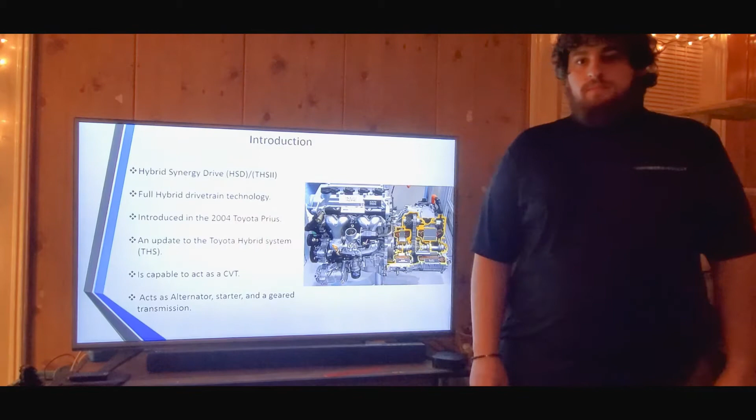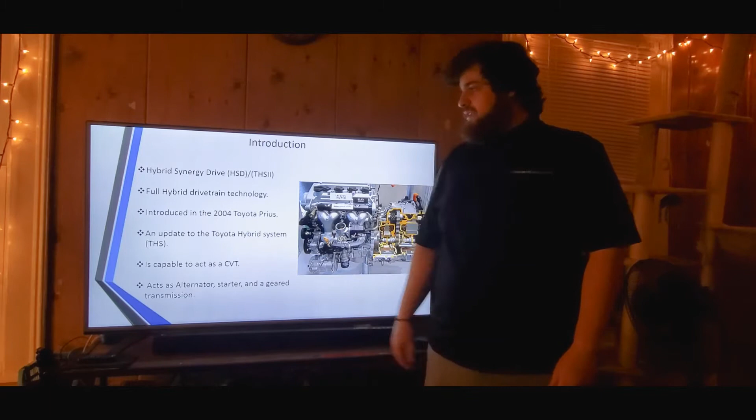The hybrid synergy drive is a full hybrid drivetrain system made by Toyota and was introduced in the 2004 Toyota Prius, and was used in other Toyota and Lexus models. The hybrid synergy drive is an update to the Toyota hybrid system, hence why some people call the hybrid synergy drive the THS2, or the Toyota Hybrid System 2.

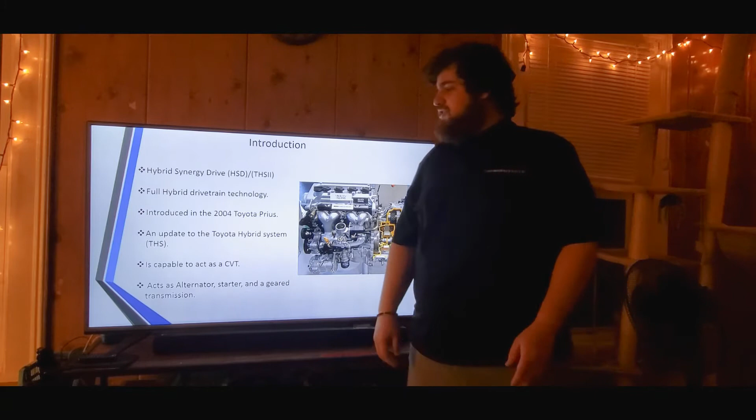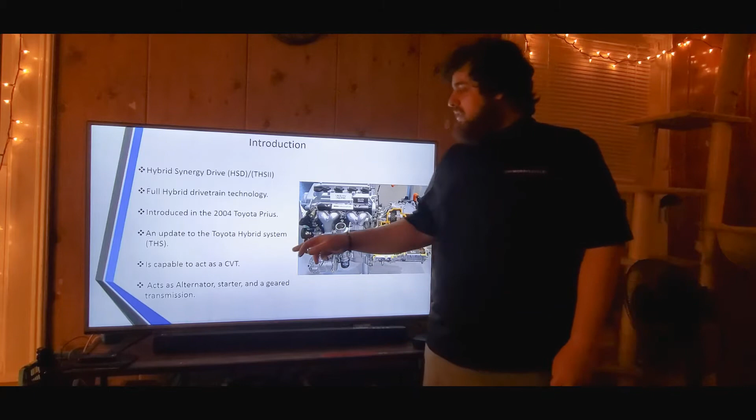The hybrid synergy drive allows the vehicle to run using only the electric motors, making it a full hybrid system. It can also act as a continuously variable transmission, as well as acting as the alternator, starter, and geared transmission, which I will touch upon in the next slides.

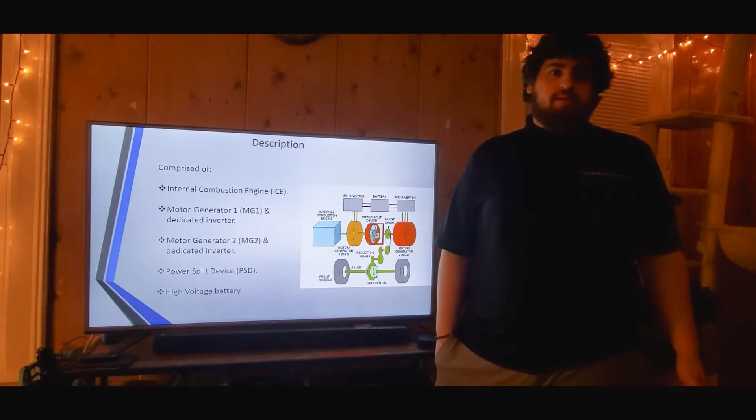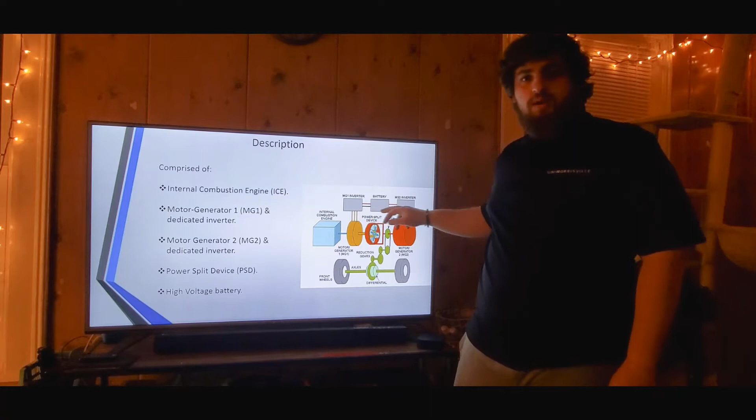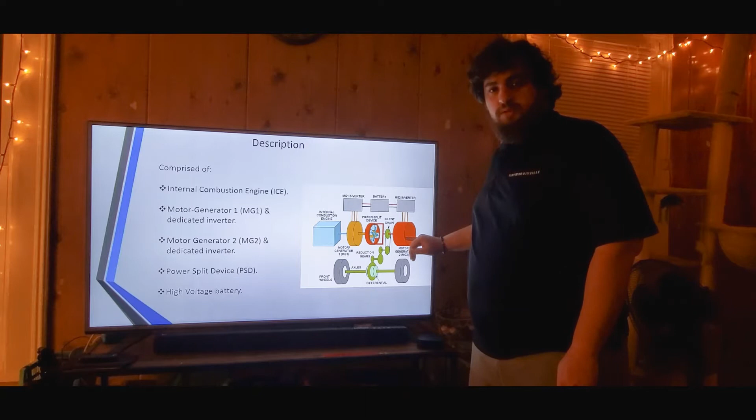The hybrid synergy drive is comprised of the internal combustion engine, which is a 4-cylinder 1.5 liter engine on the older models or 1.8 liter engine on the newer ones, 2 computer-controlled motor generators and dedicated inverters for each one, 1 high-voltage battery, and 1 power split device. The power split device connects the internal combustion engine, motor generator 1, and motor generator 2. Motor generator 2 is connected to the differential by a set of reduction gears.

In this slide, I'm going to be talking more about the description of the hybrid synergy drive. MG1, which is the motor generator 1, acts more like a generator for the whole system, as well as a starter for the internal combustion engine. MG1 can also supply more power to MG2 under certain acceleration demands.

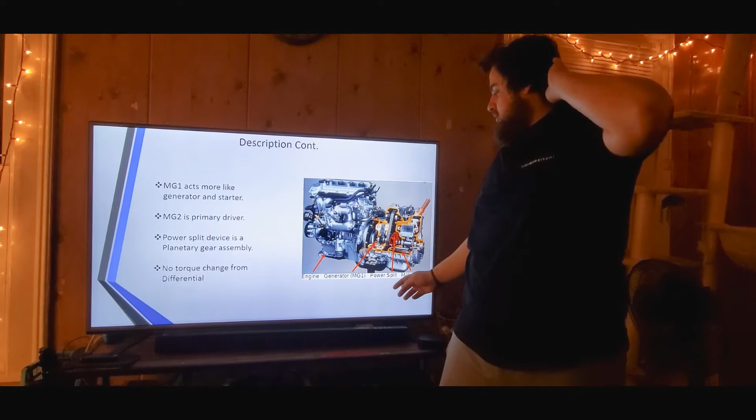The MG2, which is the motor generator 2, has more power output than MG1, and that's why it is used as the primary driver for the whole system.

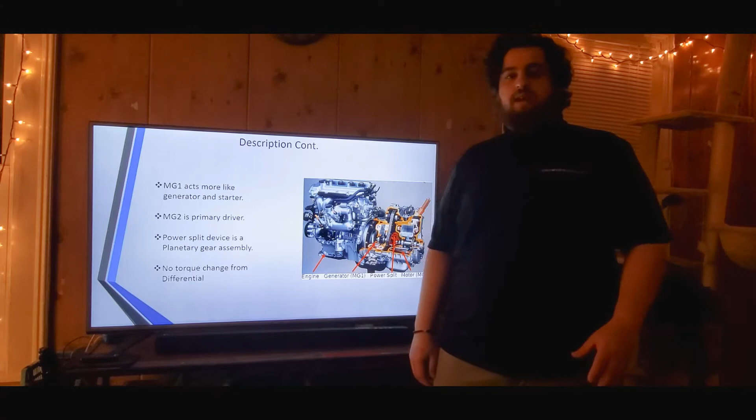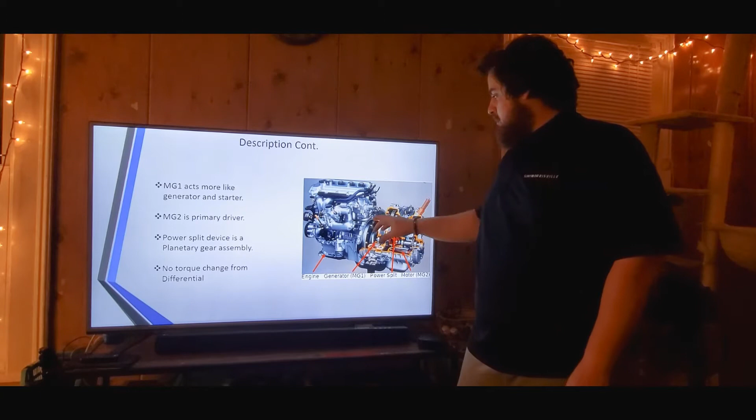The power split device in between the MG1 and MG2 is a planetary gear assembly that has a sun gear, a ring gear, and a planetary carrier. The MG1 and MG2 and power split device are all housed in one unit bolted to the internal combustion engine.

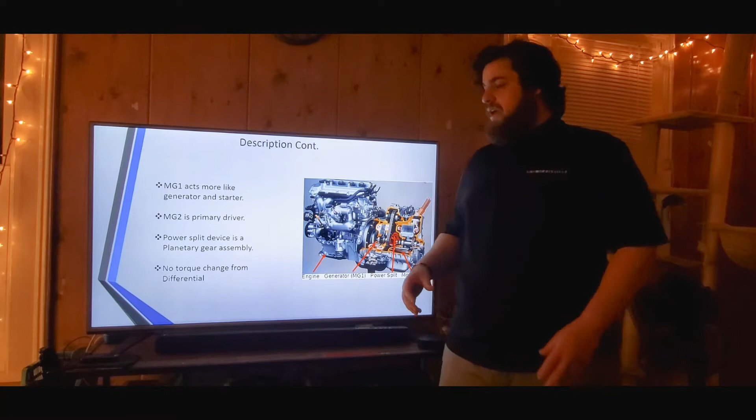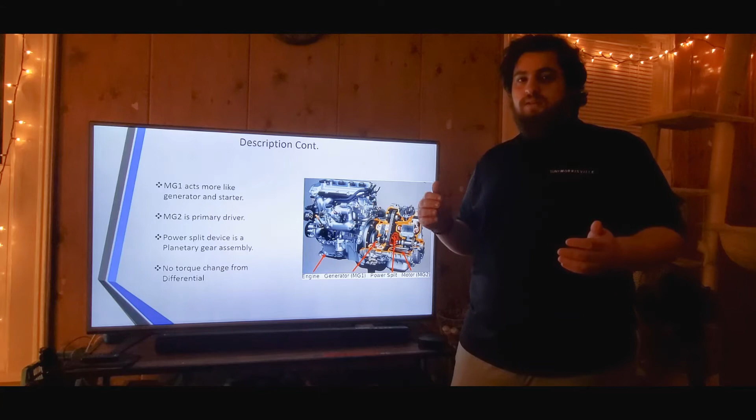What's interesting about this system, well, more about the differential that the system uses, is that it does not change the torque from the output to the input coming into the differential. It only changes the torque between the right and left wheels around a corner.

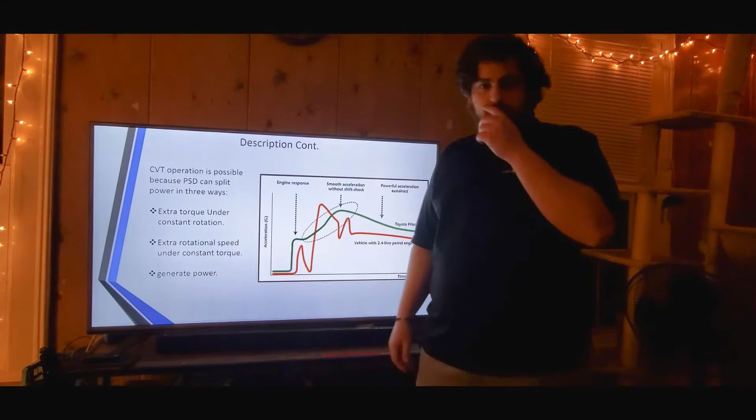Toyota's hybrid synergy drive can act as a continuously variable transmission by manipulating and splitting power in 3 ways: extra torque under constant rotation, extra rotational speed under constant torque, and it can also generate power to aid in uninterrupted acceleration.

This graph illustrates the smooth sustained acceleration of a hybrid synergy drive equipped Prius in green, compared to a 2.4 liter gasoline engine equipped vehicle in the red.

In this slide, we're going to be talking more about the hybrid synergy drive's operation, more specifically the power split device and what it's connected to.

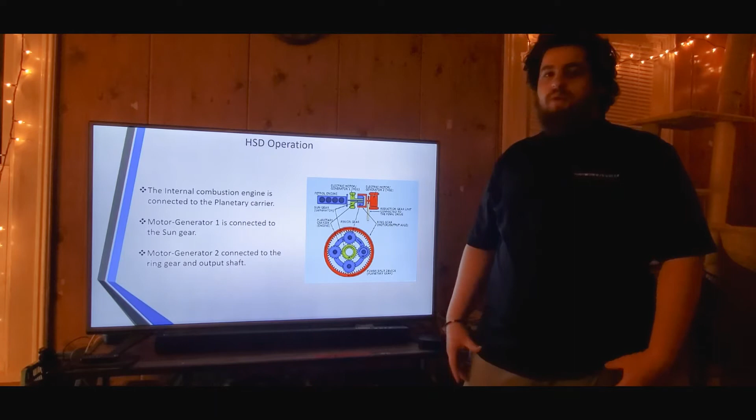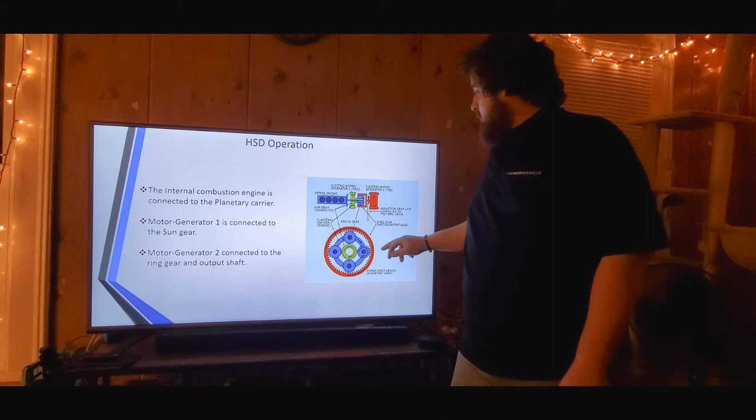The planetary carrier on the power split device is connected to the internal combustion engine, while the motor generator 1 is connected to the sun gear, and the motor generator 2 is connected to the ring gear as well as the differential through a set of reduction gears. In the next 3 slides, we're going to be talking more in depth about power split device operation, more specifically the operations that come up during certain circumstances or demands.

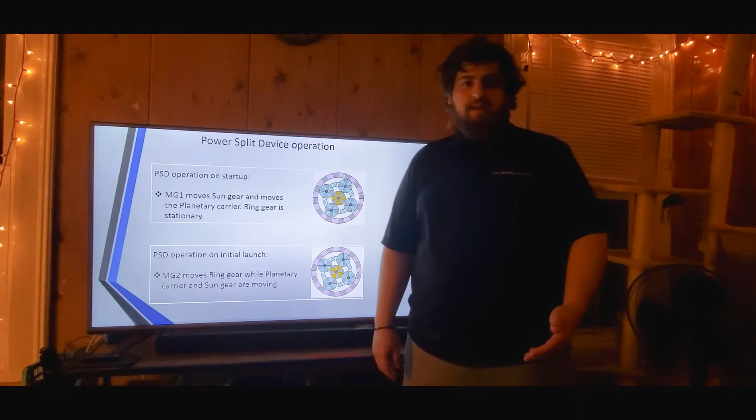The first power split device operation is startup. During startup, the MG1 powers up and moves the sun gear, which in turn moves the planetary carrier. All the while, the ring gear is stationary.

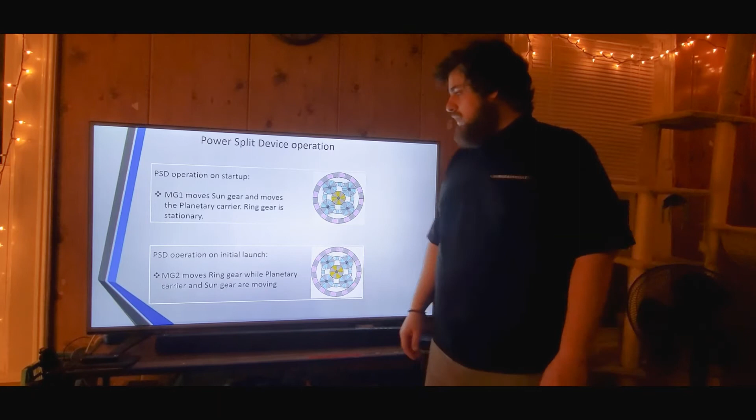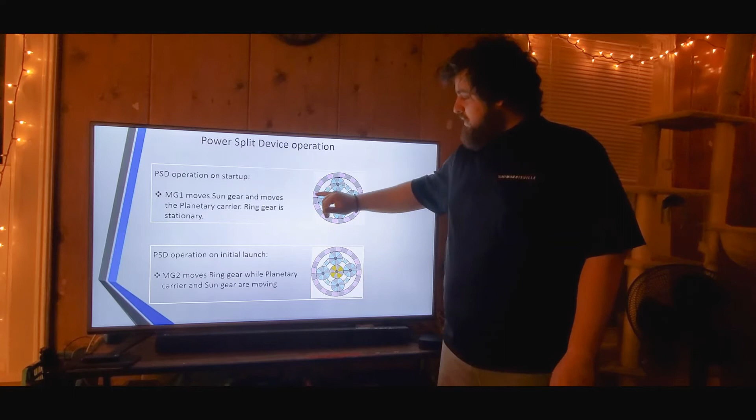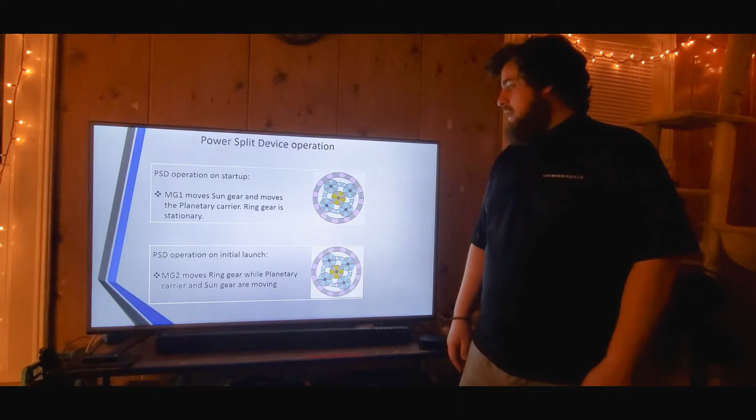The next mode of operation we have is initial launch. Since the ring gear is connected to the drive wheels through the differential, on startup it will be stopped, hence the car will not be moving. On initial launch, MG2 will power up and it will move the ring gear while the planetary carrier and the sun gear are already moving.

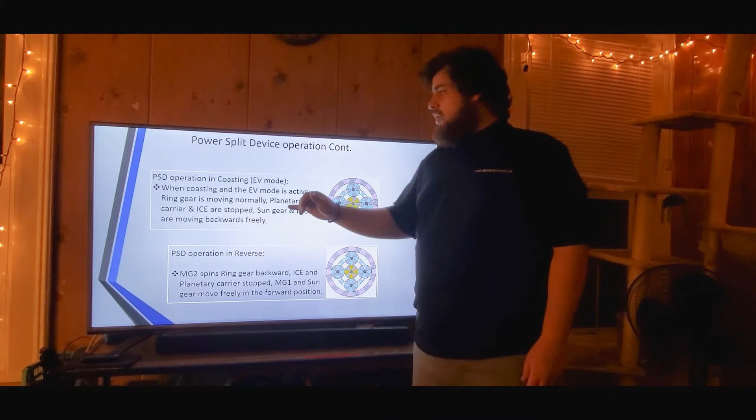The third mode of operation we have is coasting, or EV mode. EV mode means electric vehicle mode, where the vehicle is moving only on electrical power and no internal combustion engine. When coasting and EV mode is active, the ring gear would be moving normally as it was on acceleration, but the planetary carrier is going to be stationary and the internal combustion engine is going to be off. The sun gear and the motor generator 1 are going to be moving backwards freely to allow for power generation while coasting or in EV mode.

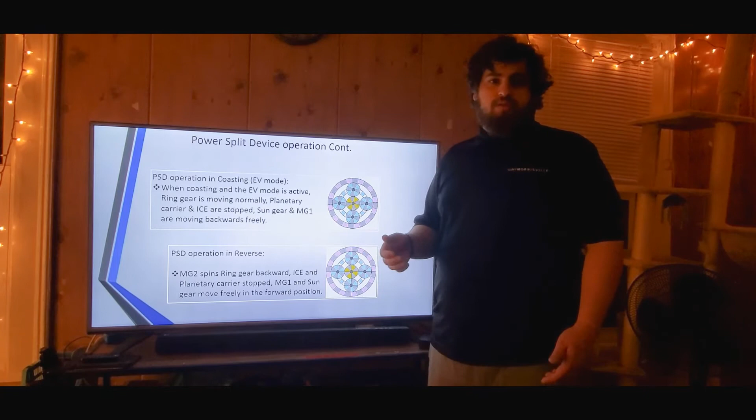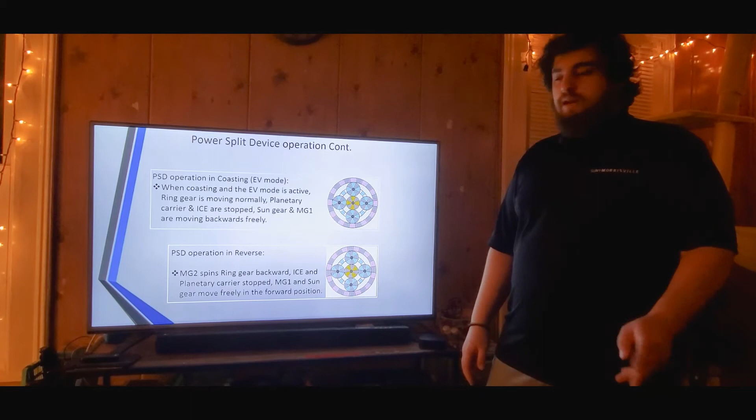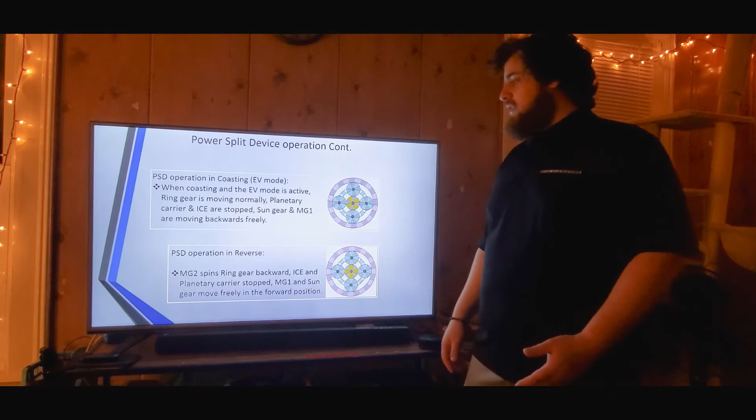The fourth mode of operation is reverse. In reverse, the motor generator 2 will start spinning in a backwards direction while the internal combustion engine is off and the planetary carrier is stationary. MG1 and the sun gear will move freely in the forward position. You can see that reverse and EV mode are quite the same, except in reverse, it's in reverse.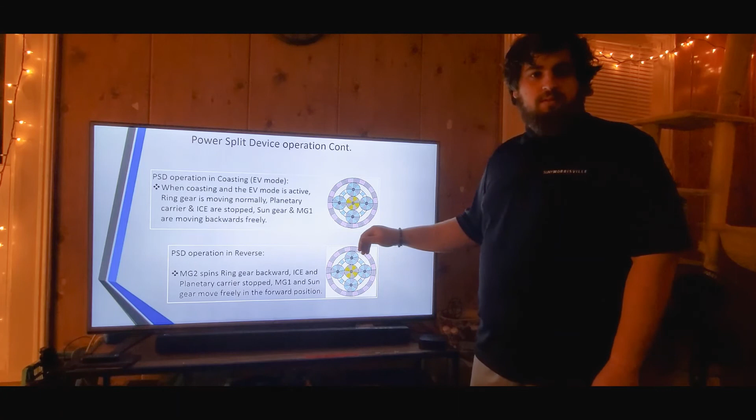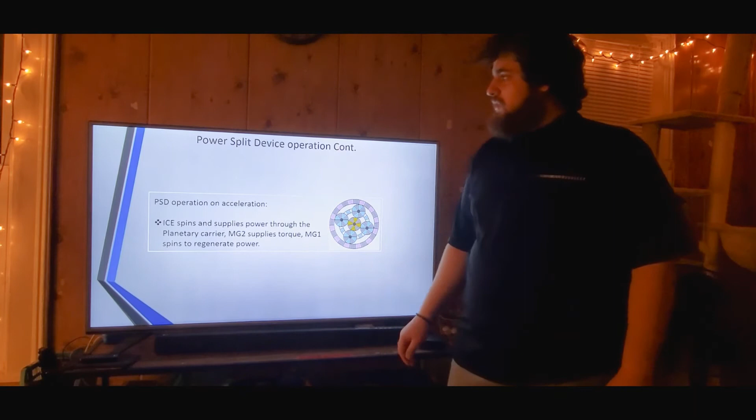In the final power split device operation slide, we're going to take a look at the fifth mode of operation for the power split device. The fifth mode of operation is going to be a high acceleration demand.

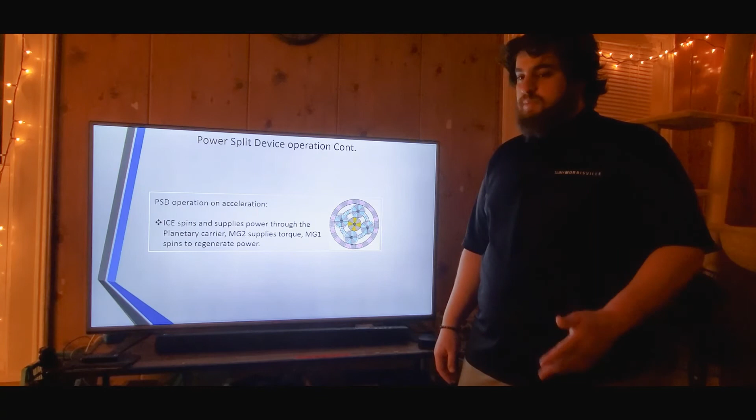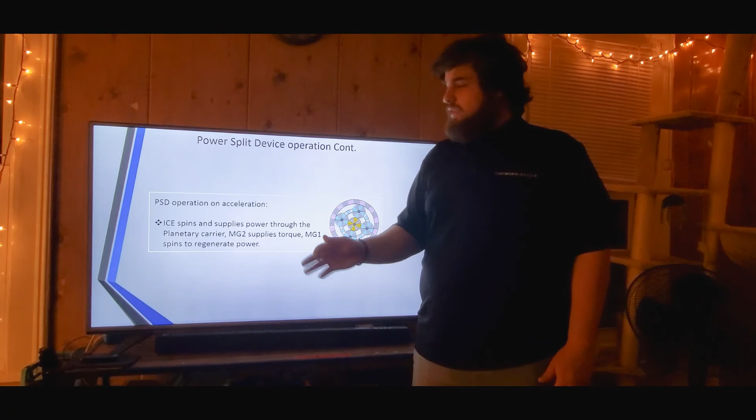While we have a high acceleration demand, the internal combustion engine is going to spin, it's going to start, and it's going to take over supplying power instead of the MG2, through the planetary carrier. The MG2 will continue supplying torque only to supplement the internal combustion engine as it spins and supplies power.

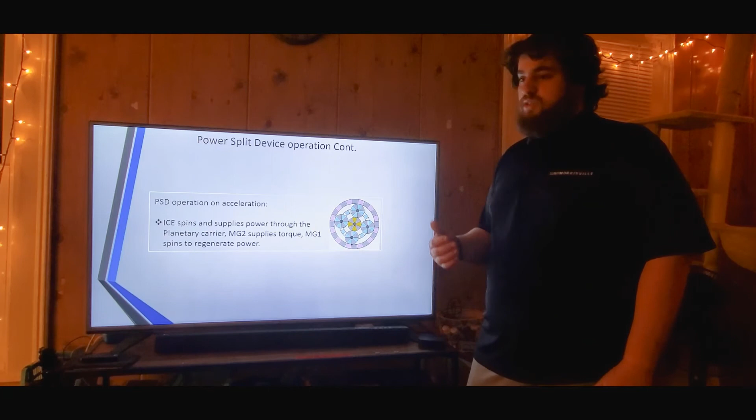All of that is happening while the MG1, the sun gear, is going to spin freely to regenerate power, which is going to aid to give a more smooth acceleration.

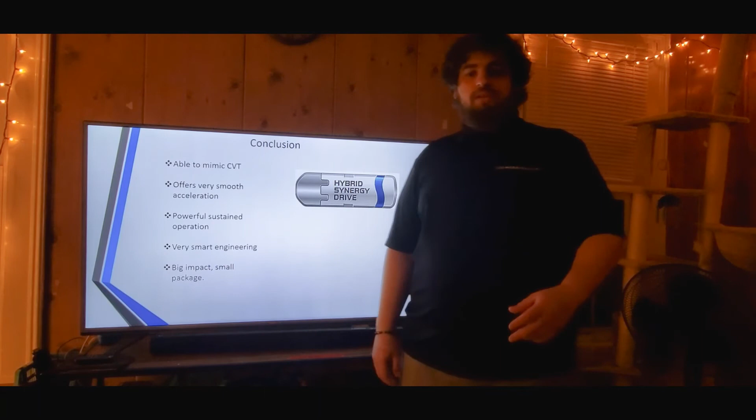In conclusion, the Toyota Hybrid Synergy Drive System is a very interesting system for a hybrid vehicle. The combination of the onboard sensors, the torque control computer, the electric motors, internal combustion engine, and power split device can multiply and divide torque in a way that mimics the continuously variable transmission.

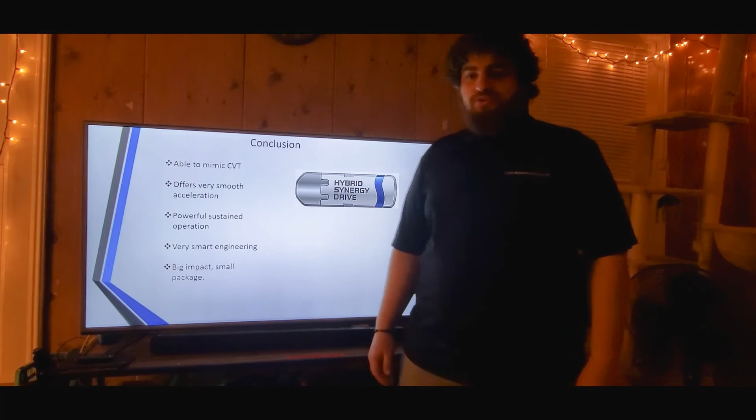The Hybrid Synergy Drive System is able to vary vehicle torque electronically in a way that makes the vehicle have a smooth and powerful sustained acceleration with no shift shocks. The system can also charge the high voltage battery while driving

using smart power split device and motor generator operation. This makes it possible for the user to never need to physically charge their vehicle, and it will just charge on the go. All this technology in the Hybrid Synergy Drive just goes to show the subject of torque multiplication and how it can change with future systems.